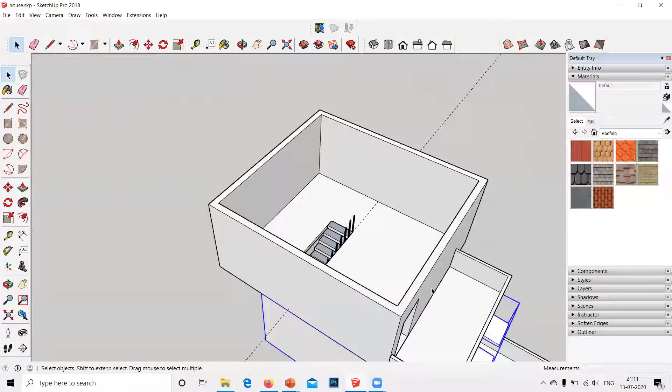Nice, we have drawn the staircase. Okay, I want my roof back. So you can see we have again deformed our room, so our roof needs to get back to shape.

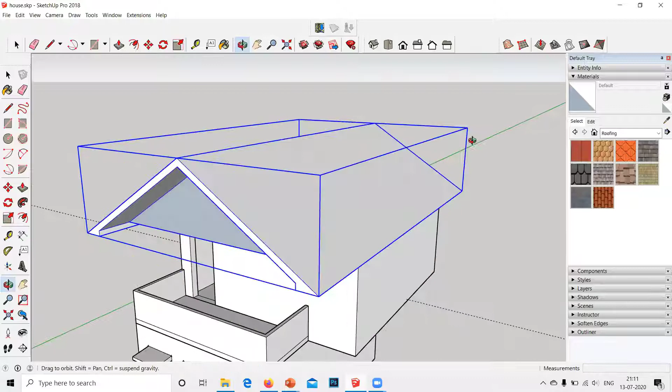Yeah, this is perfect, I just scaled it. Scale it according to yourself so that it just fits. Okay, this is nice. So we have our deck, our first floor, a staircase, and another floor. Now, what do you want to add more?

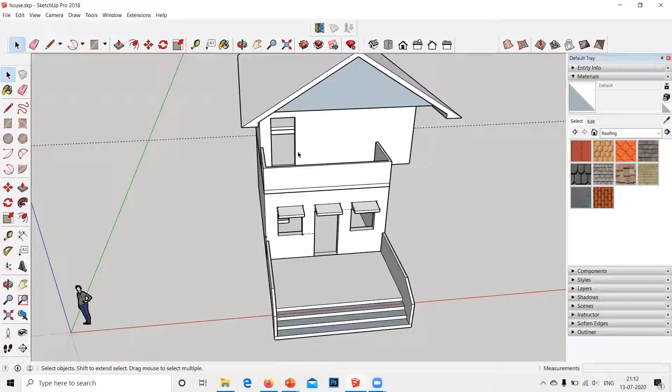Furniture, right? Okay, so before going to furniture, I'm just going to tell you how to add textures, because that is a better thing. We'll start off with our deck.

To add textures, you have to go to Window, Default Tray. You have to click on Components. If your component part is already clicked, that's okay. If it's not clicked, click on Components.

Once you click on Component, in this default tray of yours, you will be seeing many options like Entity Info, Components, Material. You have to click on Materials also. So there will be many options: Entity Info, Materials, Components, Style, Layers, Shadows and all.

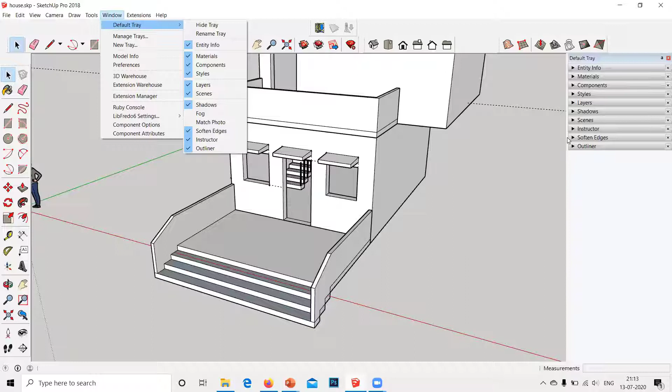You can do one thing, click on the Shadow option. Once you click on the Shadow option, above Time, where there's written time, there's a small box. Click on this. Click on the small box above time. You can see your whole house has a shadow inside it. I'm deleting this guideline.

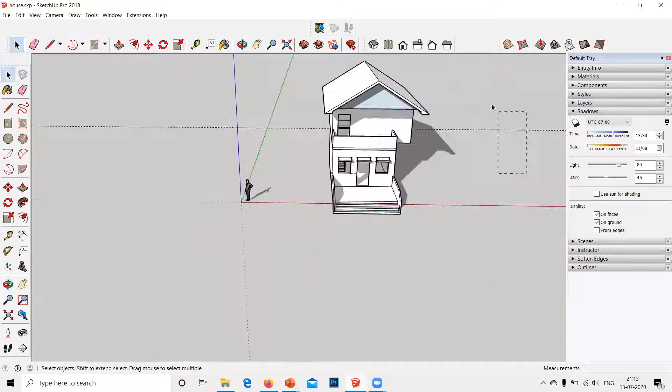Okay, so it looks really realistic, right? So I clicked on the shadow. Now I'm going to go to the material part.

I'm going to start off with my stairs. So generally for stairs, we'll use tiles. Go to the tile option. Actually, you can explore whatever you want to do because this material part is very interesting.

I'm using tiles, you can also use concrete, or cladding, brick cladding, anything. But generally for flooring we use tiles, that's why I'm going to use tiles. Okay, I selected these tiles: tile variegated stone. Nice.

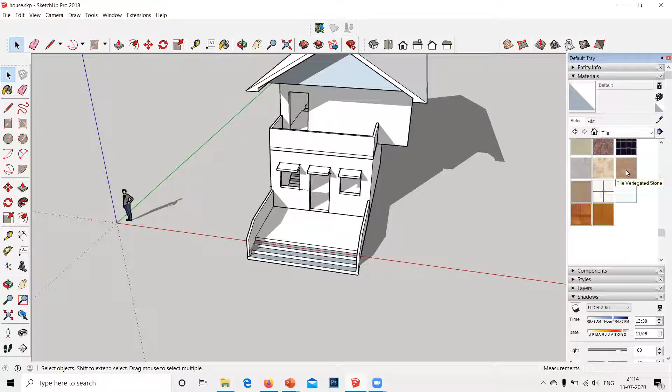Okay sorry, see what I did here. As this whole thing was a group, once I clicked on it, the whole group gets painted. I don't want that, let's just Control Z undo. I'll enter inside this group and now...

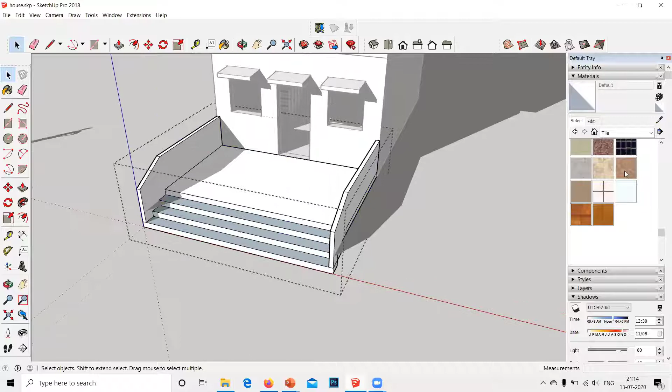I'll fill this. And if you want to give a different texture to your height, you know, like this, or like this. Yeah, this is better, see, this looks nice.

So now I'll give a texture to the railings. Don't forget to double click to enter inside a group. Okay, I double clicked. Go to Landscaping, Fencing and Vegetation. Usually only here you will get the texture for railings. Okay select, these are the textures for railings.

I'm selecting fencing wood old. No, I'll select this fencing picket concave. Okay, see.

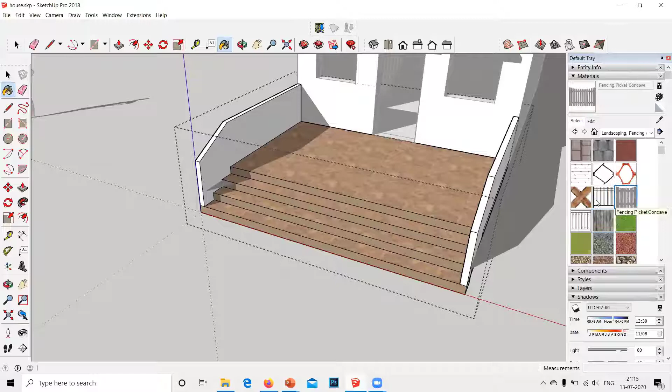So right now, this weird thing is happening that it is not in a perfect shape or size, you can say. To bring it to perfect shape or size, beside the select option over here, there's an edit option. Click on this edit option.

There are multiple options below this texture. I want you to come over here in this dimension part. In mine, it is written 1524 and 1067. I'll just increase the height.

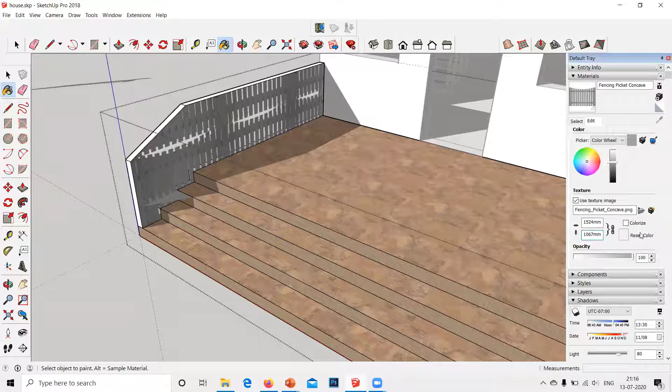I'll make it as 2067. No, I'll make it as 3067. You have to do it for yourself, otherwise you won't be able to find the perfect shape. I'm entering 1800, no, 1900.

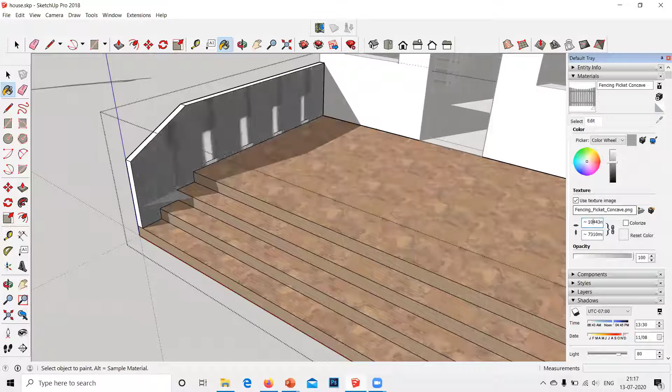Okay, so this is how you work with textures. You will have to even increase or decrease the scale of your whole material till it gets perfect. Even I can't sometimes get it perfectly done, I'll just leave it right here.

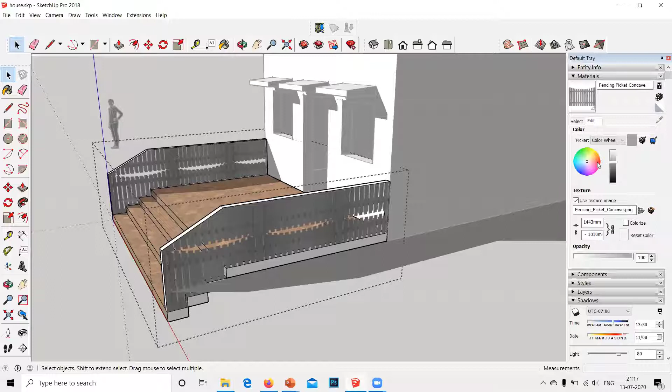But when you are doing your own fence, make sure that you come at a specific size. So now, even if you want to change the color of your fence, you can change it. There's this color picker wheel. I select this red color, and I choose a very dark shade. It looks like brownish something.

I'm not very satisfied with my fence. I'll just go to the select option and I'll select the older fence. Okay, this is far better.

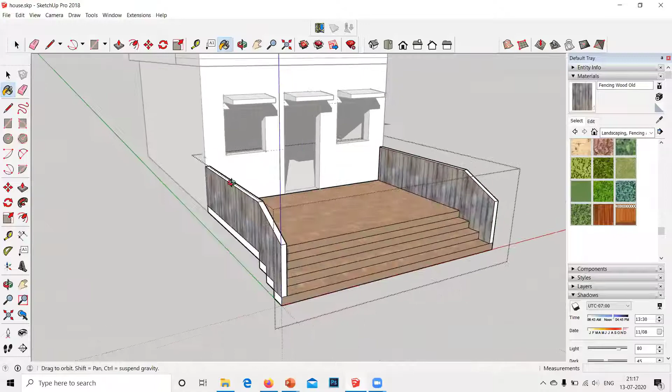Okay, you can still choose that fence and you can adjust the scale. Yeah, I have chosen this thing, this looks better. Color each and every portion which is visible to you.

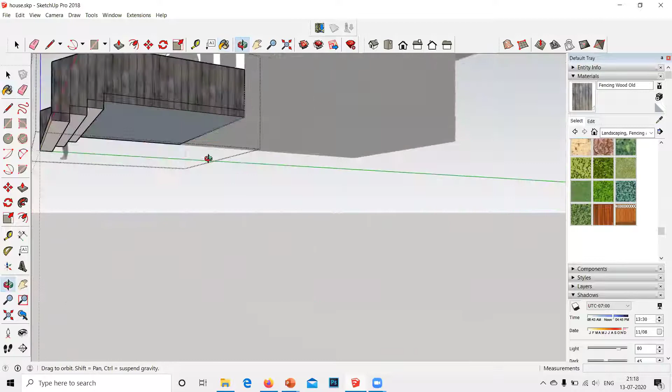We have not made a ground yet, that's why this whole portion is looking empty. We are going to make a ground also. So now we have covered the deck portion.

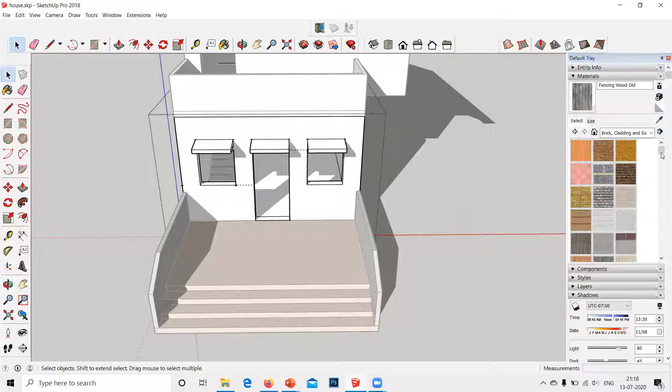Now I want you to come to this house portion, the ground floor. Okay, double click, go to brick cladding siding. I usually prefer giving a brick cladding to my house because it looks nice, but you can give any cladding you want. I'll choose this brick antique.

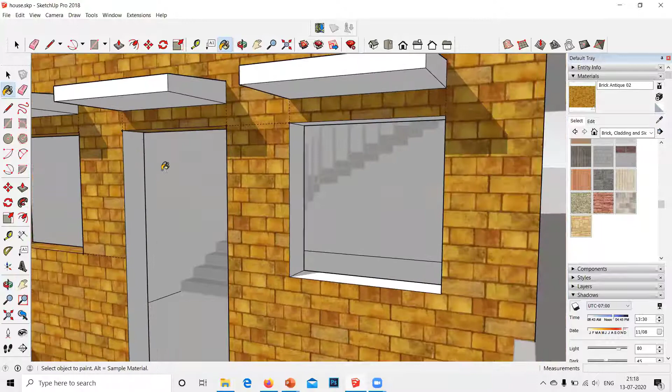To all the sides of my house, I've chosen this thing. Even in these portions, even in my door and window openings, I'll give this brick cladding. Okay, so yeah, we have covered this portion.

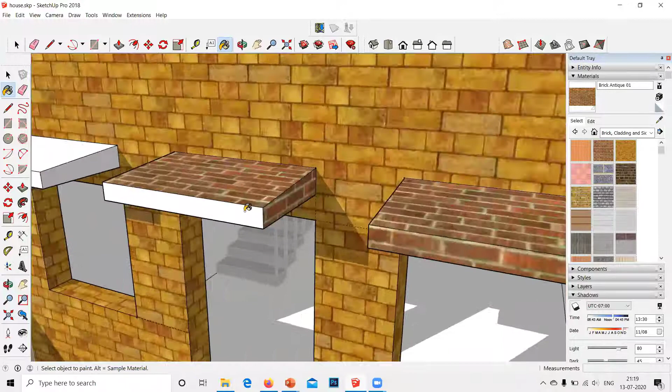And now we are left with our chhajjas. If you want to give your chhajjas the same as your brick wall, that's okay. Otherwise you can also give it as a different texture. Okay, this is not looking nice, I'll go back to my original thing.

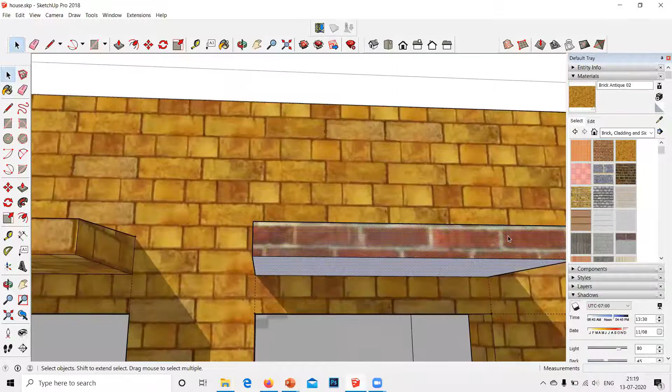If you want to paint multiple surfaces at the same time, you just click all these surfaces, control select, press control and keep pressing control and select all these faces. Don't release your control button. This makes all your selections. You have selected all the faces at once.

Now click on this texture and done. We have painted.

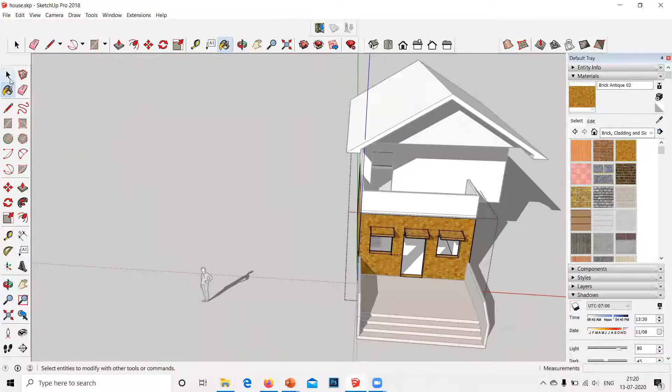Now go inside. Okay, I want to give a wooden staircase. I choose wood, okay this wood looks nice. Enter the first component, enter the first stair of this first component and select wood.

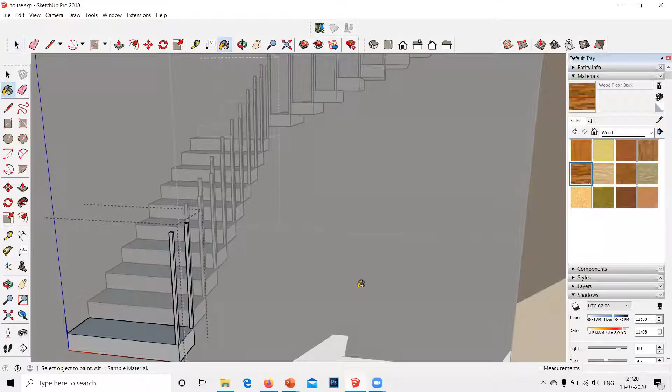As you can see, once I come out, all the floor of the stairs have turned into the same texture. I'll select this, now a darker color like this.

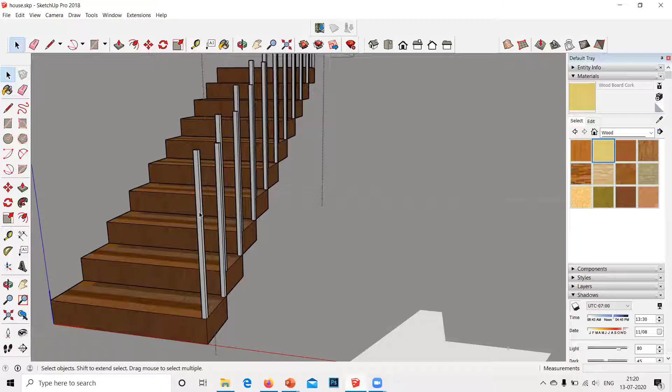Okay, this looks nice. I'll give the railing a little, you can give any texture, I'll give this texture. This looks nice. We have drawn a little dangerous railing, but still it is good for our first session for staircases.

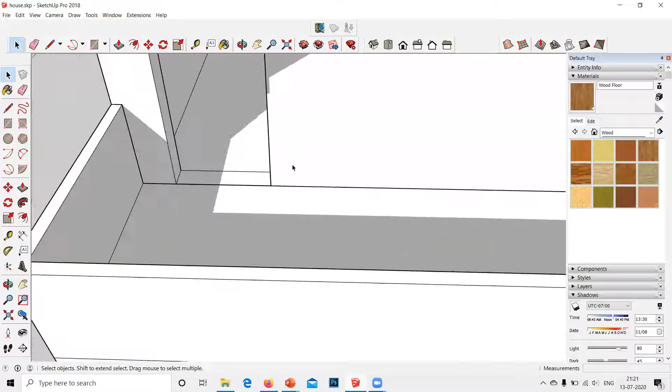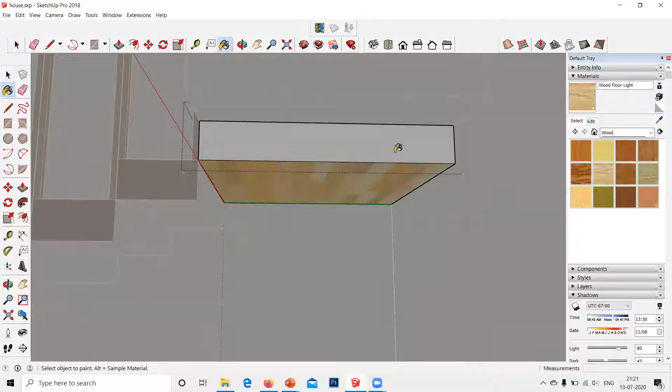You have to also paint your mid landing, because if you remember we had done the make unique thing for our mid landing. Yeah, this is fine. You can also color these portions below the staircase part. Just by coloring one thing, you can color the whole stair set, the staircase, which we call.

Okay, so I just want to save it right here. Otherwise, if my laptop power cuts or if my laptop just shuts accidentally, it will still be there.

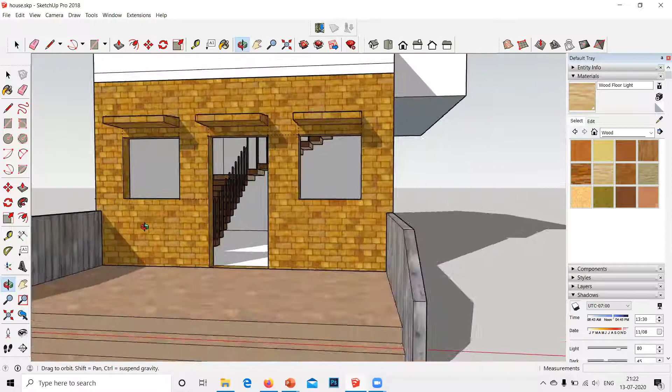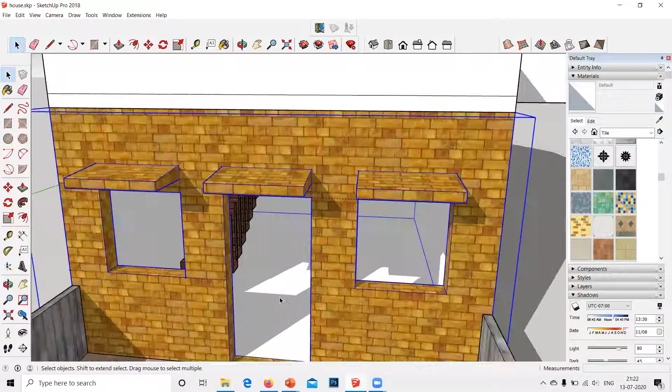Now I'll give a tile pattern inside my house. I'll give this tile pattern. See, I just clicked the whole thing because it was a group, it even got into the walls. I don't want that, control Z. I only select my floor and give this to it.

Now the walls, I'll click on the walls. And now I'll go to brick cladding, I'll go to cladding. Yeah, this looks good.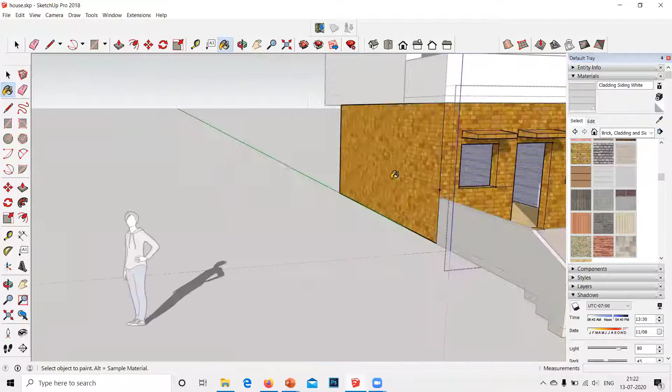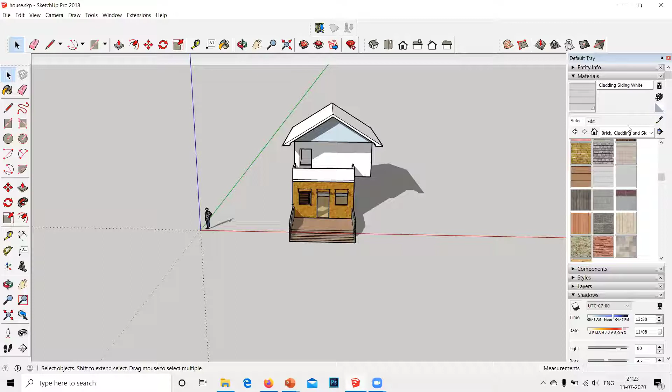Now the same thing, I don't need to repeat the whole thing. Instead, I'll just move on to other tools, and I request you all to keep the whole texture part in your hands. You have to practice so much that you remember which texture is under what tab. So this is how you give textures.

There are multiple textures like water. If you are drawing a swimming pool, you can give a texture as water. You can even use stone. You can use glass, there are multiple options of glass and mirrors also.